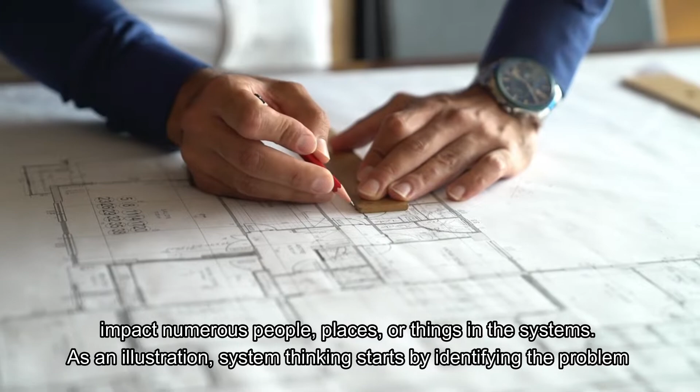In order to solve the world issues, chemical engineers need to approach systems thinking to generate technical solutions in a way that can impact numerous people, places, or things in the systems. As an illustration, system thinking starts by identifying the problem, then generating a hypothesis to address the issue. Once generated, the hypothesis is tested and evaluated from experimentation. Lastly, the changes are then applied to the systems to mitigate the issue.

Besides, chemical engineers need to ensure energy efficiency in the various sectors, which means less energy consumption in performing a particular project. This can in turn reduce energy demands while also reducing the operation costs in the production line. To achieve energy efficiency, renewable energy technologies are one of the many ways to accomplish the goal. For starters, we can get energy from wind power, solar power, and hydropower without relying on non-renewable resources such as coal, petroleum, and natural gas.

Due to the increasing human population, the demand for water, energy, and food also increases. Hence, chemical engineers should develop sustainable solutions at the water-energy-food nexus. A chemical engineer should think of the three resources as an entity and study the connections between them, together with their synergies, conflicts, and trade-offs that arise from the management of these resources.

As the problems of resource shortage and environmental pollution are indefinitely rising, sustainable waste management, especially wastewater treatment, will be a vital process in achieving sustainability. With the advancement of technology, various ideas have been proposed as applications in wastewater treatment. One of the ideas includes microbial fuel cells, which can be regarded as a promising method to achieve sustainable wastewater treatment. Hence, we will look into the technical and economic viability of this method at a larger scale in real-life application.

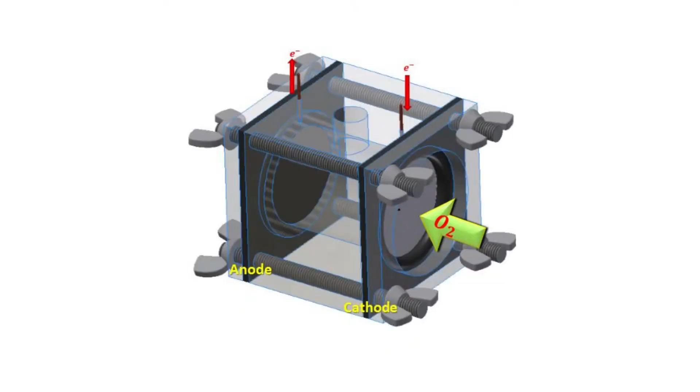A microbial fuel cell is a bioelectrochemical device that can generate electricity by the use of electrons obtained from anaerobic oxidation of substrates, in which the substrate present in this case is the wastewater. A microbial fuel cell consists of two electrodes held in separate chambers, namely the anode and cathode chamber. The anode chamber contains bacteria and is anaerobic, while the cathode chamber is aerobic.

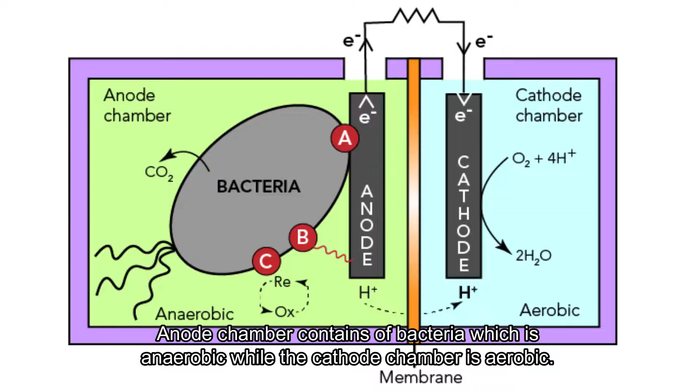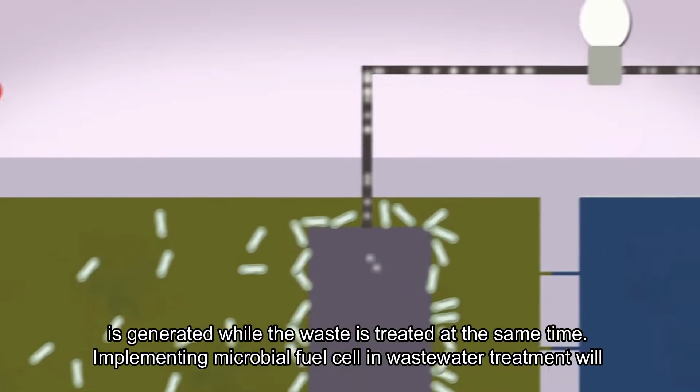The bacteria in the anode chamber will break down the organic substances in the wastewater to produce electrons. The electrons will then flow through the electrode in the cathode chamber. A relatively low current will be produced, and electricity is generated while the waste is treated at the same time. Implementing microbial fuel cells in wastewater treatment will allow the effluent to meet the standards of water reclamation. Since water is one of the valuable resources in the world, this method is especially valuable nowadays to replenish the consumption of water due to growing human population.

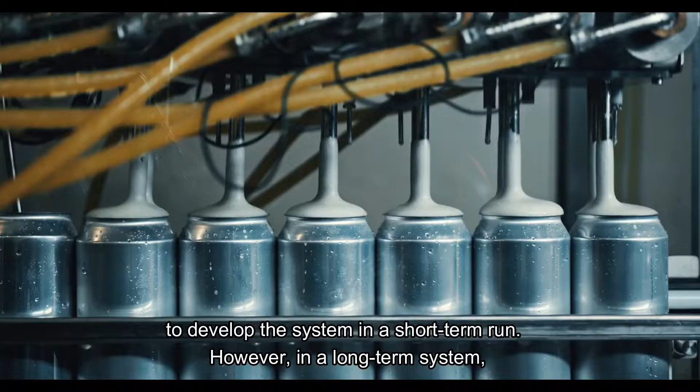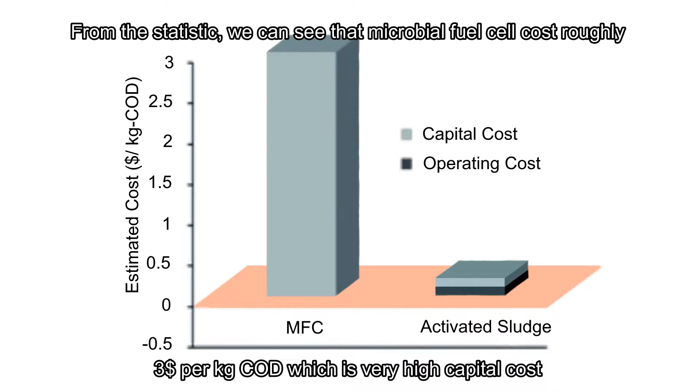Furthermore, practical application of microbial fuel cells has great challenges in cost due to the large capital cost to develop the system in a short-term run. However, in a long-term system, the operation of a microbial fuel cell could be energy-saving compared to many other treatment technologies. From the statistics, we can see that a microbial fuel cell costs roughly $3 per kilogram COD, which is a very high capital cost as compared to other treatment technologies. However, the operating cost of a microbial fuel cell is close to zero.

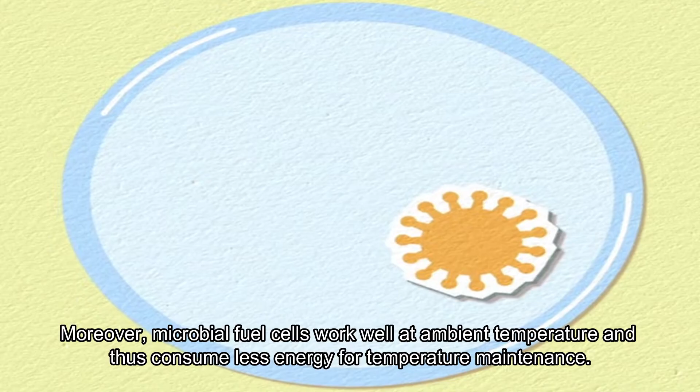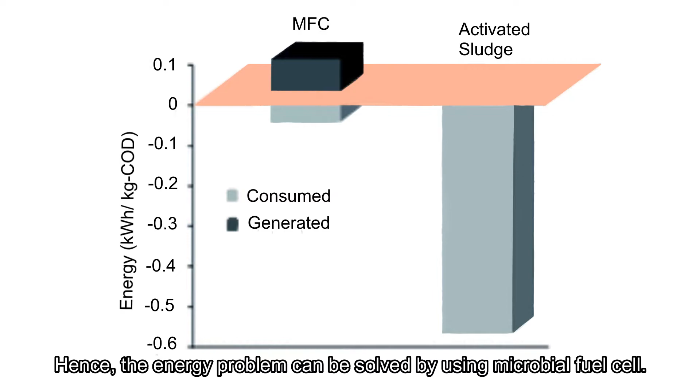Besides, one of the advantages of microbial fuel cells is their capability to directly extract electric energy from organic substances in wastewater. Moreover, microbial fuel cells work well at ambient temperature and thus consume less energy for temperature maintenance. From the statistics, it was shown that the energy generation of a microbial fuel cell is higher than its energy consumption as compared to other treatment technologies. Hence, the energy problem can be solved by using microbial fuel cells.

In conclusion, although microbial fuel cells can possibly solve the energy problem, there are still challenges in implementing microbial fuel cells in large-scale real-life applications. Therefore, microbial fuel cells could be integrated with other technologies for a more feasible operation.